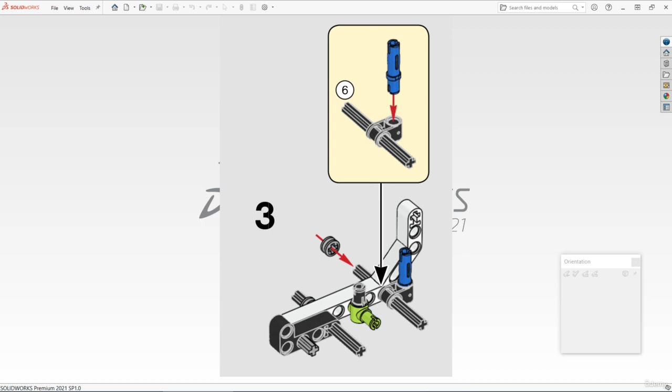We're now on to stage 3, and for this we need 2 new parts. We need a longer friction pin, and we also need a cross block, which allows us to join a pin and an axle at 90 degrees.

Let's start off with a friction pin, and looking at this longer version, it's pretty similar to that first friction pin that we made, so we can use that as a starting point, and then we can just make some adjustments to the model. Let's open that original friction pin file. Here it is. I'm just going to drag it into SolidWorks. And then we're going to save this as a copy and then modify the file.

So once the file is opened, the first thing we're going to do is save it as a copy. You can do this by going to File, Save As. And then from the menu, let's choose Save as Copy and Open, which is this bottom one. Let's give it a new name, something like Long Friction Pin, and then press Save. And if you get a message asking if you want to keep the original file open, it's up to you. Personally, I've closed it just to avoid any confusion with that file.

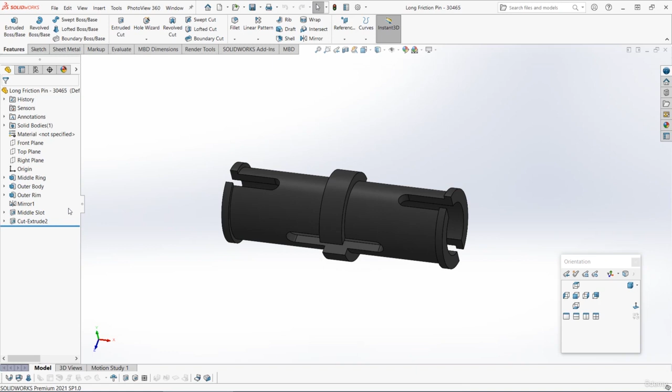Now we can modify this friction pin model instead of making the new one completely from scratch. And the first thing that I'm going to do is drag the rollback bar up to below the first feature. That first feature is the ring that's in the middle of the pin. And this is actually the same on both the short pin and the long pin. So we can just leave this as it is, and we can drag down below the next feature, which is the outer body. Now this is where things start to differ a little bit.

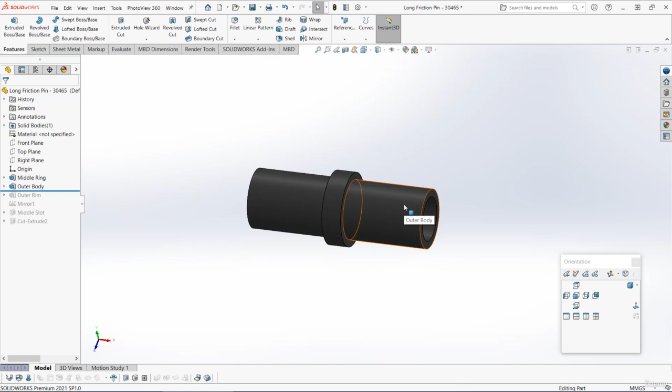On the original pin, we extruded in 2 directions equally. But on this longer pin, we want to extrude in 1 direction, and then the other direction needs to be twice as long. All of the other sizes stay the same though, the inside and outside diameter. To adjust the width, first we've got to edit this feature. So click on the outer body feature, and then press Edit Feature. And let's change the end condition here from mid-plane to blind. So now we're just extruding in 1 single direction.

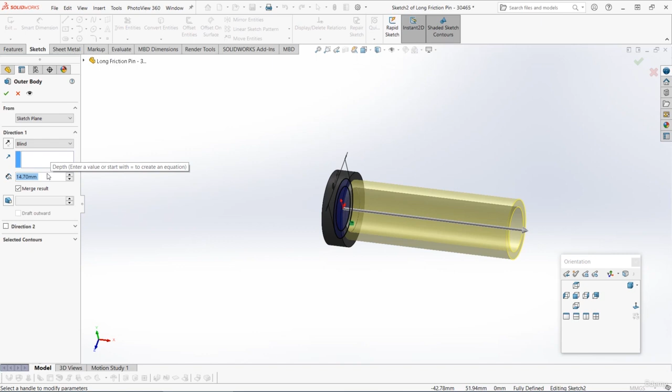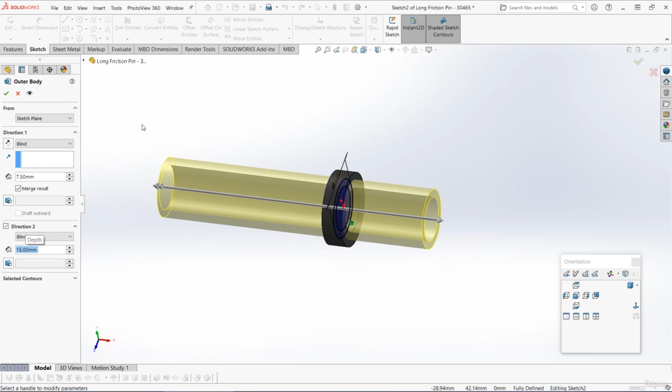For the first direction, we're going to extrude 7.5 millimeters. And then we want to extrude twice that distance in the other direction. You can do this by clicking here where it says direction 2. For this extrude, we're going to continue with the blind end condition, but we're going to extrude 15 millimeters. So it's double the length of the opposite side. So we're extruding one side by 7.5 and then the other side by 15. And when that looks good, you can press OK.

Now that we've got the basic shape, we can drag down below the next feature, which is the outer rim. And that is all the same. We're just extruding that small amount by 0.5 millimeters from the end of the pin. But if we drag down below the next feature, the mirror, we can see that this rim on this side is in the wrong place. So we can just completely delete that mirror feature, and let's just draw another rim manually.

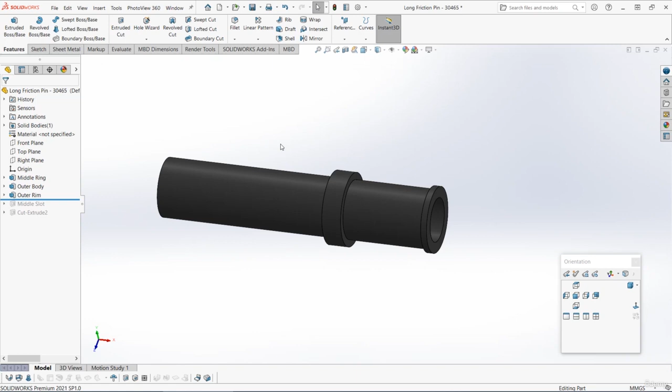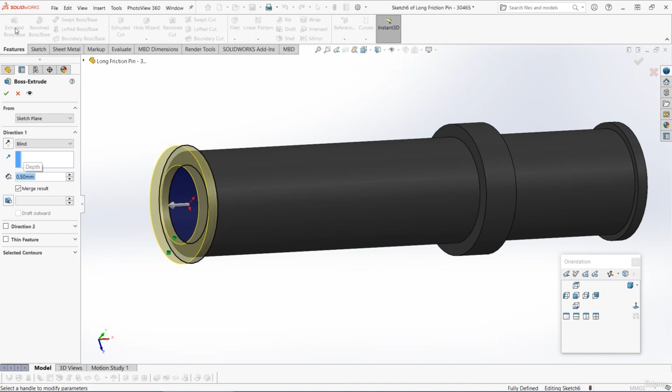So spin the pin around, start a sketch on this end face. Let's choose that inner edge and press Convert Entities. And then let's choose the outer edge on the other side and press Convert Entities again. So you should have 2 concentric circles. One of them's the size of the inner diameter, and one of them's the size of the outer rim on the other end. We can then extrude that 0.5 millimeters outwards. And we should have the overall correct shape there now.

We can rename this feature as Outer Rim 2, and then we can drag back down below the next feature. This next one is the middle slot, and if we look at the model, this is actually in the wrong position now. It's straddling that wider part in the middle when it should be further over to the right.

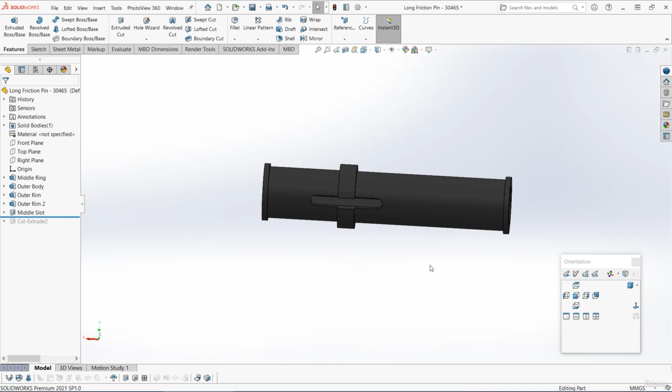So what we need to do is edit the sketch underneath that middle slot feature. So click on the feature and press Edit Sketch. And I'm going to go to a normal to view so we can see quite clearly where we're cutting. So the size of the slot is the same. It's still 6.9 by 1 millimeter. We just need to move the position.

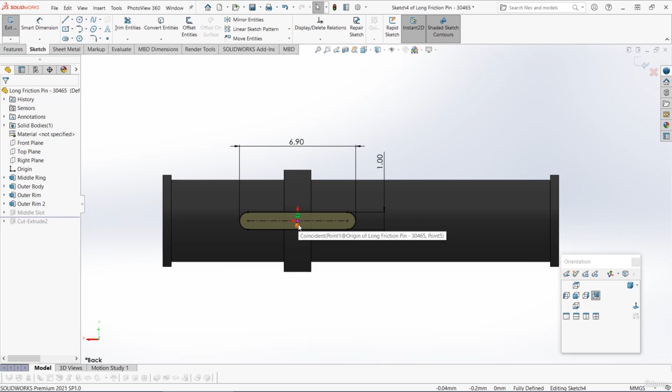To do this, we need to delete the coincident relation that anchors it in place on the origin. So click on the point at the center of the slot and then delete the coincident relation. Depending on your view settings, you might be able to just click on the coincident icon and press delete. But if you can't see it there, then actually click on the center point of that slot, and then you should be able to see the coincident relation here on the left, and you can then delete it.

Now that that coincident relation is gone, we can move that slot around, and you can see it's turned blue. So let's move it to roughly the correct position, somewhere like here. Then let's set the up-down distance. So to do this, let's select that point in the middle of the slot, and then let's also select the origin, and let's make those horizontal.

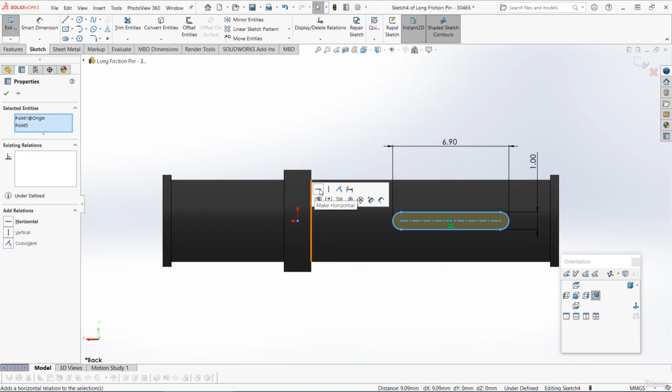And then for the exact left-right spacing, I've measured it from the end of the pin here. So let's get the Smart Dimension tool, and let's add a dimension from the end of the pin to the outside curved edge of the slot. Remember, you can hold down Shift to dimension to the arc. And that dimension there should be 4.3 millimeters. And then just press OK, and now we can see that slot is going through in the correct place.

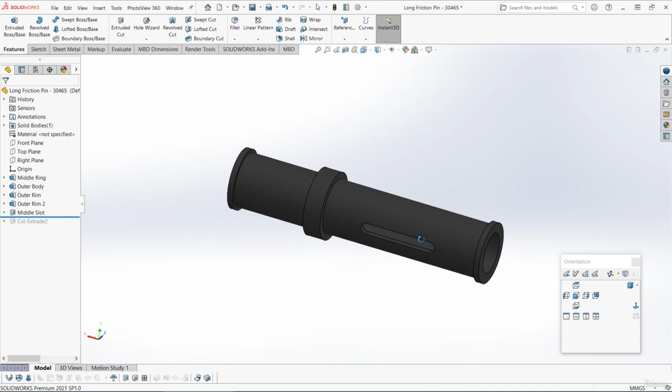Now we can drag back down below the final feature to just add in those final end slots. And I'm just going to rename this feature to say end slots. Now if we spin the model around and we look at those slots, one of the ends looks correct, but the other one, the slot's in the wrong position. So again, we need to edit the sketch underneath this feature. So click on the feature and then press Edit Sketch.

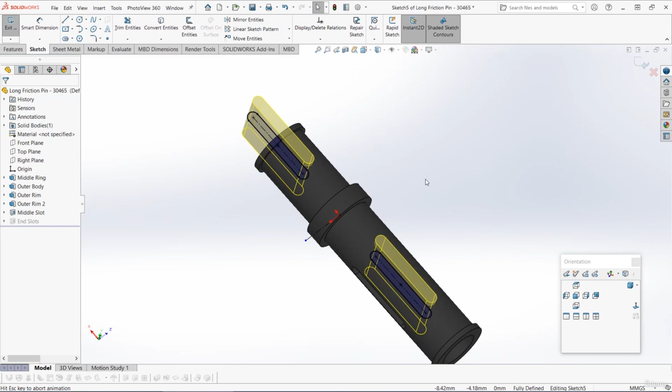If we now go to normal to view, you can see the one on the right is correct, but the one on the left needs to be moved outwards to the left so that it's also on the outer edge of the pin. To move the slot, first we'll have to move the center line that it's mirrored about. So click on the center line, click on the point that's fixed to the origin, and then delete the relations there. So that center line is now free to move around.

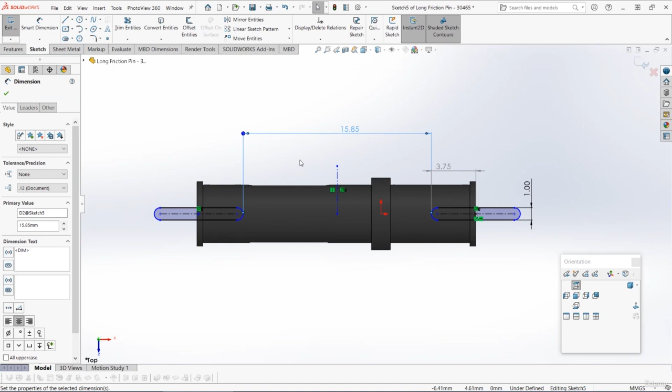Next up, we know the distance between the slots should be 15.85 from measuring it. So I'm going to double click on this 8.5 and I'm going to change that to 15.85, and that will move the slots apart. We're still not quite in the correct position though, and we're still not fully defined. So what you're going to have to do is grab the center point of this left-hand slot and then just drag it out so it's at the midpoint of the left-hand edge of the pin. And that should fully define your sketch.

So this one on the right is fixed at the midpoint of the right-hand edge, and the one on the left is fixed at the midpoint of the left-hand edge. And the distance between them is 15.85. So in this case, because we've got those other relations and dimensions, it means that it doesn't really matter where the position of the center line is. It can only actually be in that one position in the middle. Then when you're happy, press OK, and that will create those cuts.

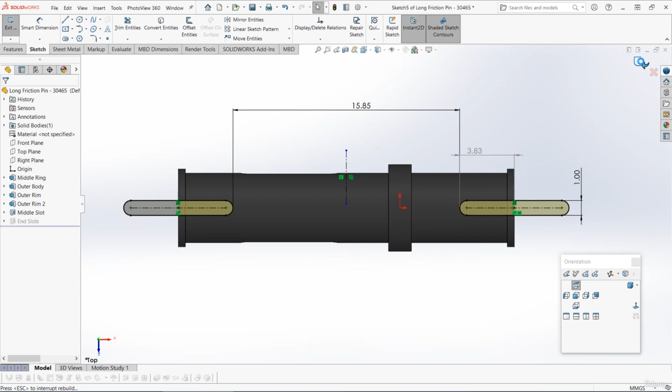Then the final thing we need to do is just change the color. So let's go to the Appearance, Scenes and Decals tab on the right, and let's choose a standard blue. And now this part is finished, so you can save it. In the next video, we'll be making a completely new part, the cross block, that allows you to join an axle and a pin.